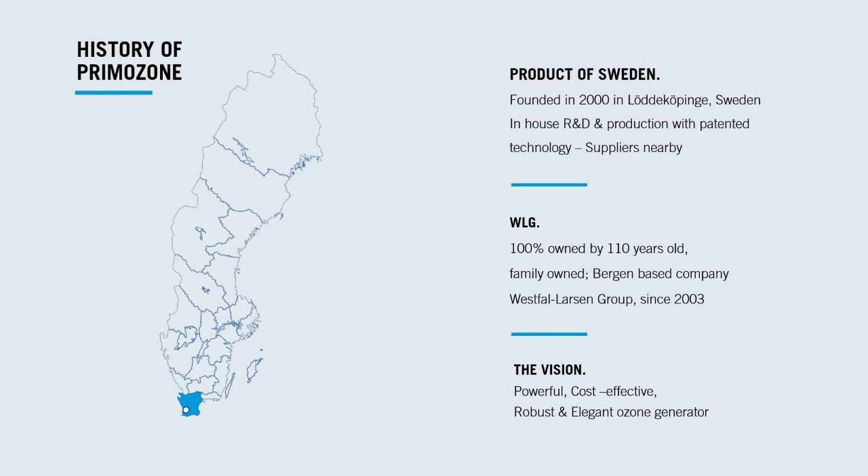We are also very proud to have a strong, well-established, long-sighted owner, the Norwegian family-owned Westfal-Larsen Group. With over 100 years of history, they have been our only owner since 2003. Our vision has always been to bring powerful, cost-efficient, robust, compact, yet elegant ozone generators to the market, and our goal is to redefine ozone technology worldwide.

Talking about worldwide - worldwide is a key word for us. We have always been working towards the international market, and now we're a little bit more international with our newly founded subsidiary Primozone Inc, located in Melbourne, Florida. Our aim for Primozone Inc is to be a reference point for sales and technology support, not only in the US, but the whole of North America.

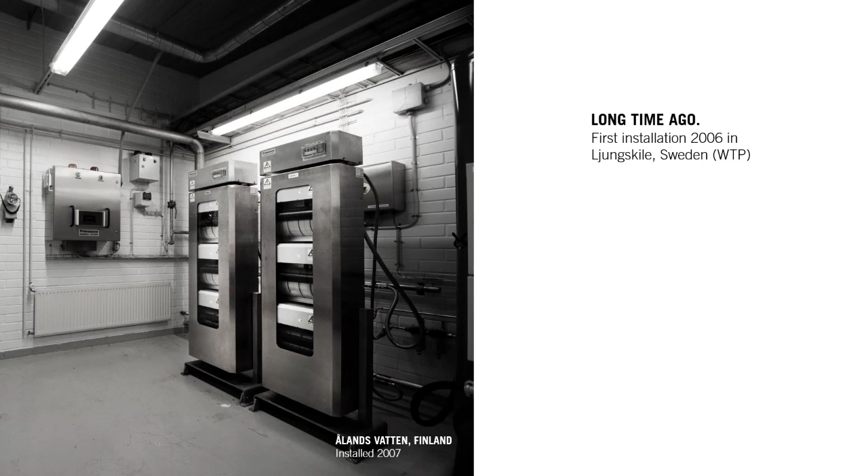Since the first Primozone installation in Ljungskile back in 2006, Primozone has expanded globally, and already our second installation was outside Sweden, namely Åland in the Baltic Sea between Sweden and Finland. We can now proudly state that the number of Primozone installations worldwide exceeds 500.

During the years of our growth, we have always kept an eye on the evolving regulations, leading us to other very important steps in our development, approvals and certifications. In addition to the CE marking on our entire product series, we now offer cUL approved control panels for the United States and Canada.

We pursue high quality and efficiency, not only of our products, but also of our company, which is certified compliant to ISO 9001 for quality management and ISO 14001 for environmental management. Primozone also owns a letter of access for the EurO3zon group dossier of approval of ozone as a safe biocide according to the European Union Biocidal Directive.

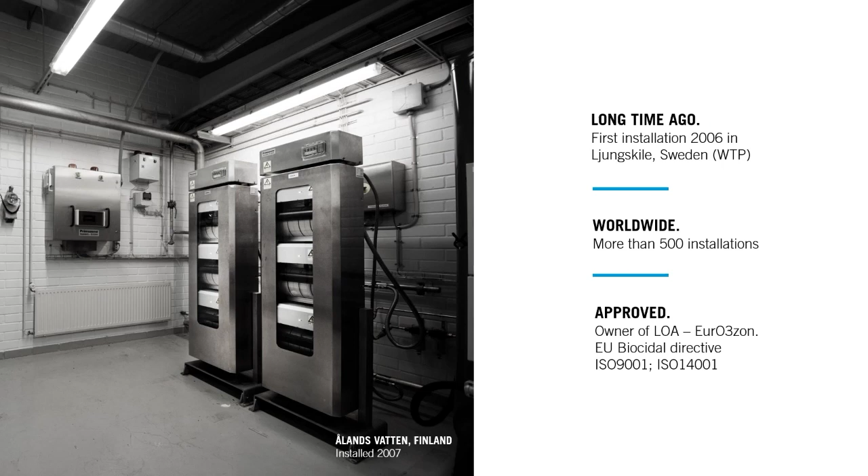Primozone operates in three main sectors: aquaculture, industrial, and municipal. Aquaculture, more specifically recirculating aquaculture systems. Scandinavia is leading the world of aquaculture and the progress in sustainable fish farming. We are proud to be part of this as the number one provider of ozone solutions for aquaculture in the world.

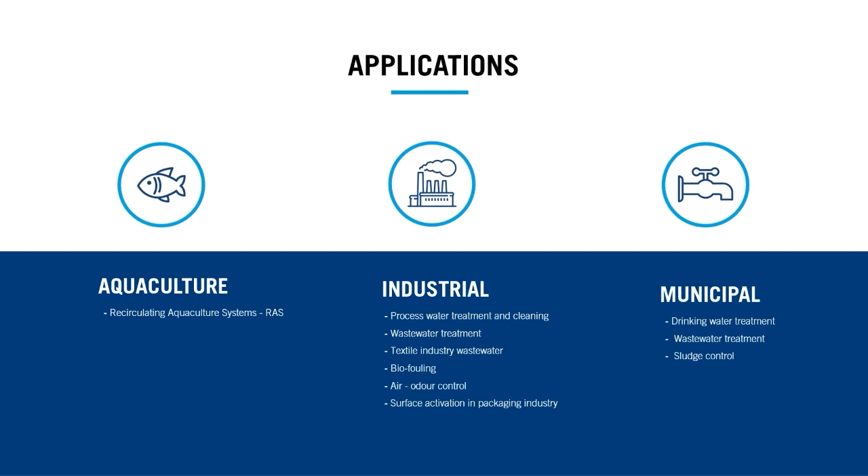We are in a number of industrial sectors and have experience with the applications of ozone to many different processes, thanks also to our products, which reliability and performance can meet even the highest demands - for example, those of the photovoltaic and semiconductor industry. In the municipal sector, we work with both drinking water and wastewater applications and have systems for water reuse and sludge control.

One of our core products is, of course, the Primozone ozone generator. The GM1-4 2.0 on the picture is our newest series of ozone generator, the most compact machine which can generate up to 240 grams of ozone per hour in the space of a bit more than half a meter cube.

They are not only space efficient, but they also save energy and time with the newly introduced features, which allows use of warmer cooling water, increasing generator reliability even more, and make it quick and easy to use with a modern and user-friendly interface.

Modularity and scalability have always been key to Primozone features. And so our ozone generators line ranges from the GM1-4 to single-sided generators GM6, 12 and 18, to the double-sided generators GM24, 36, 48, from 6 up to 2,400 grams of ozone per hour.

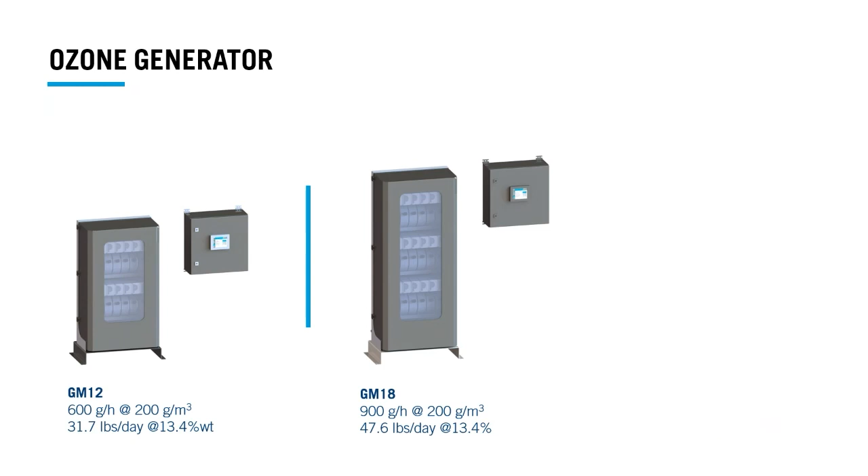This is done while keeping the same core, the Primozone patented reactor and power supply, and the same benefits: small footprint, high reliability, and minimal maintenance needed.

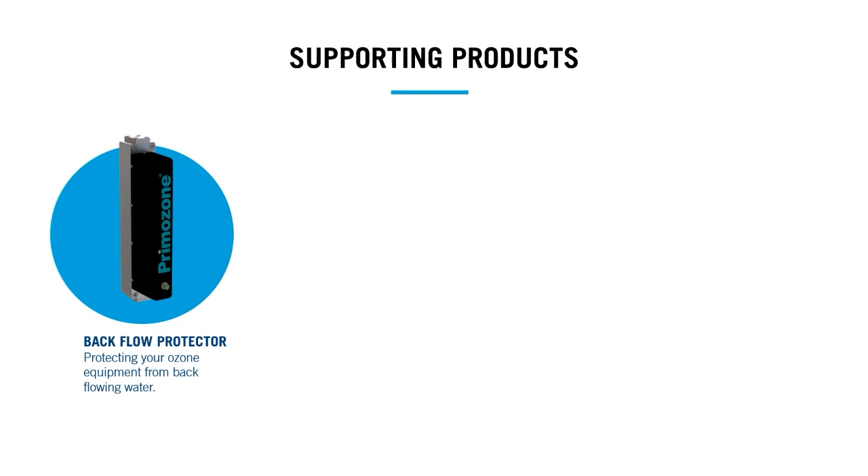We have the latest arrival in the series, the Primozone CSM cooling skid for effective cooling with minimal energy consumption where cooling water is available.

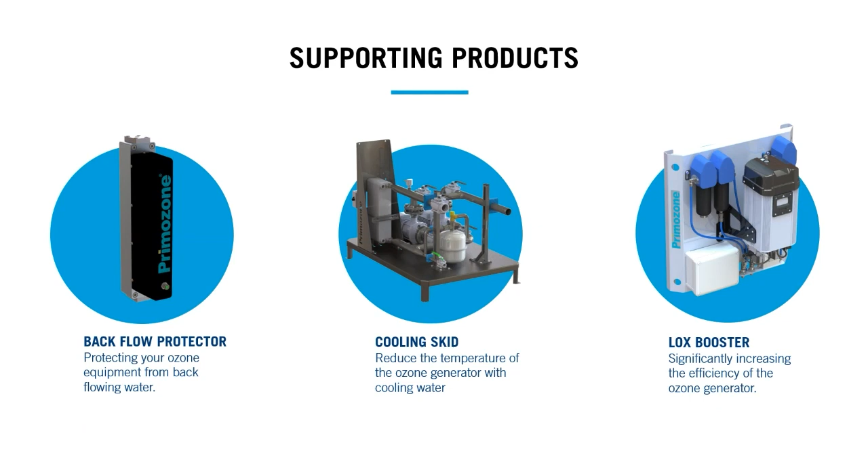And then we have the Primozone LOX booster to minimize the loss of ozone production and maximize your equipment performance when producing ozone from liquid oxygen.

Thank you, Jesper. And hello, everyone. So now from Primozone to ozone. All ozone providers owe their success to this powerful molecule and its unique, extraordinary features, which we will now look into.

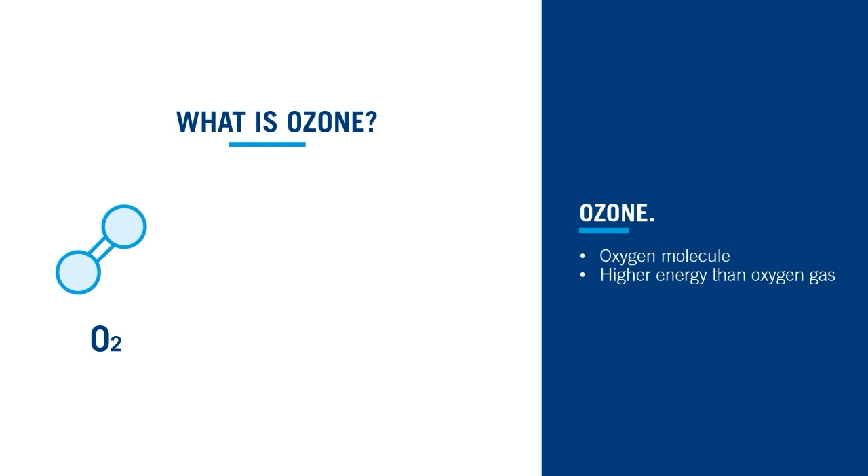Ozone is a similar molecule to oxygen, more specifically an allotrope of oxygen, one of the different physical forms in which the element can exist. At room temperature, both ozone and oxygen are gases, but while oxygen is odorless and colorless, ozone is characterized by a pale blue color and a unique strong odor, which gave it its name. The word ozone comes from the Greek word ozein, which means in fact to smell.

Molecules form when the total energy of the electrons is lower in the molecule than in the individual atoms. The lower the energy, the more stable the molecule. The oxygen molecule, O2, is the lowest and therefore most stable energy state and most common oxygen allotrope in nature.

There is a very strong double bond between the two oxygen atoms, which we need energy to break, electricity in normal practice. A small part of the electricity that we apply to oxygen will be transferred to its atoms, bringing them to a higher energy state, individual oxygen atoms, also known as oxygen radicals.

Oxygen radicals are characterized by very high energy. They are very unstable and will tend to bond with whatever can bring them to a lower energy state. When a single oxygen atom creates a bond with O2, ozone will be formed, O3.

Ozone's energy level is in between those of the oxygen radical, the highest, and of the oxygen molecule, the lowest. The bond between the oxygen molecule and the third oxygen atom is a single bond, which is weaker and less stable than the double bond between the oxygen atoms forming O2.

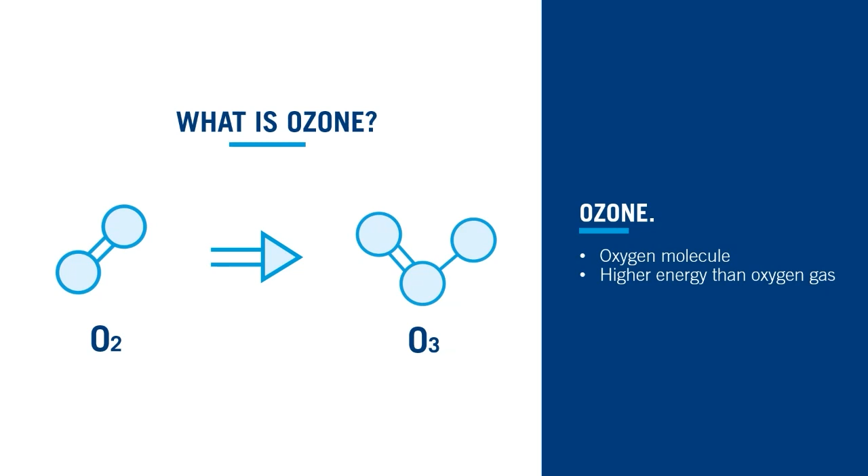Ozone is still a very high energy molecule, which means it is less stable than oxygen. Ozone won't stay ozone for a long time. It will always tend to revert to oxygen, its lower energy state. It will do so either through a chemical reaction with a different compound or spontaneously over time.

The half-life in water at room temperature is only 20 minutes, which means that over this time, half of the ozone will have decomposed back to oxygen. At higher temperatures, the half-life will be shorter. In other words, in warmer water, ozone decays faster.

This is not only true in water, heat in general destroys ozone, which is a critical aspect in the design of ozone generators, ozone distribution systems, and ozone processes. Temperature can play an important role in the design of ozone systems, especially for application to warmer effluents, like, for example, industrial wastewater. Temperature is also important when the reaction with the target compound itself generates a high amount of heat, which could affect the next steps in the process.

When ozone reacts with certain compounds, heat is generated, and if these compounds are present in high quantities and the effluent is being recirculated for complete treatment, its higher temperature can make the application of ozone less and less effective over time.

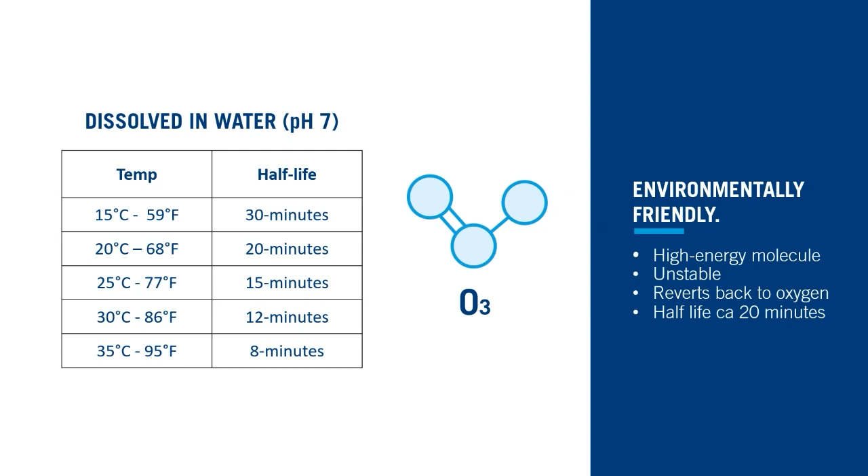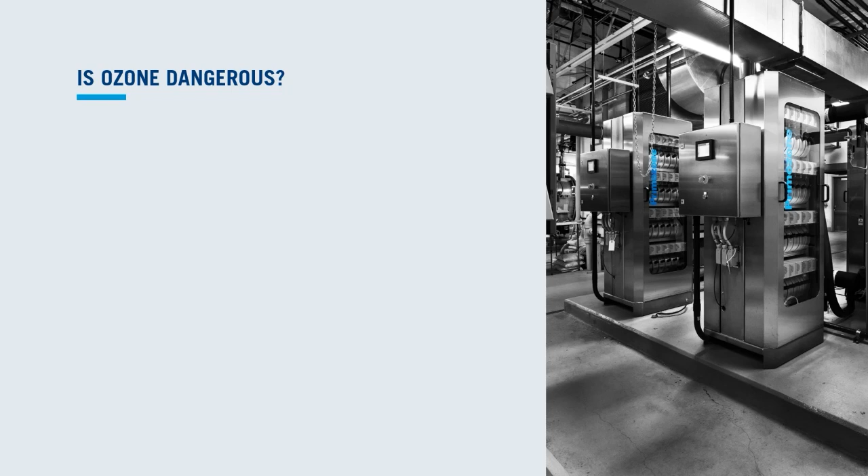Ozone and oxygen are both essential for our survival. For example, the ozone in the atmosphere shields us from the sun's harmful UV light. But ozone, unlike oxygen, is not a gas that we should breathe. It would have a harmful effect on our lungs. This led to the common misconception of ozone being a very dangerous chemical, while in reality, ozone is not any less safe than other common substances used in industry.

One clarifying example is perhaps nitrogen. It is used in food packaging, like packed meat and vegetables, to preserve their freshness, protect their nutrients, and prevent microbial growth. Nitrogen cannot be detected by humans, and the nitrogen-enriched environment depletes oxygen. So if the concentration of nitrogen is too high, the body becomes oxygen deprived before one can even realize what is happening. That is definitely not the case with ozone, which has such a strong smell that people can detect its presence at a concentration in ambient air much lower than what would be dangerous.

But let's look together at some ozone facts, which will hopefully make us more familiar with this substance. Ozone is naturally occurring. It is produced, for example, by lightning and by UV light from the sun. A small percentage of the Earth's atmosphere is ozone, and ozone is also part of the stratosphere.

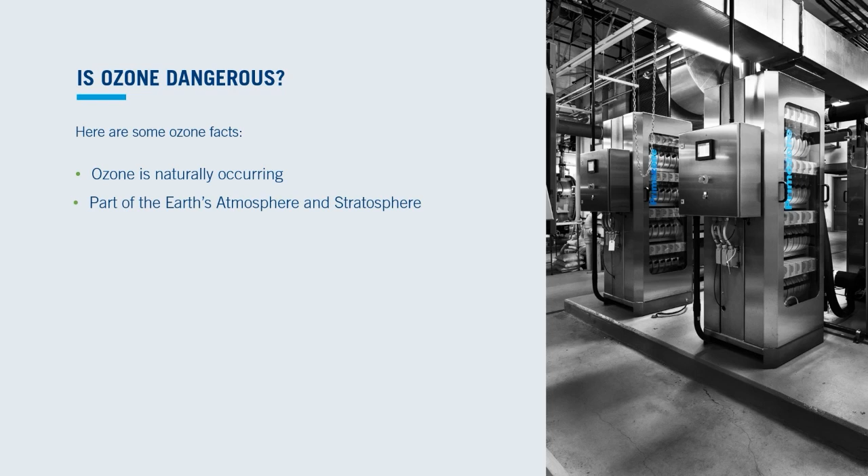Ozone is approved as a safe biocide according to the Biocidal Products Regulation. An active substance must be evaluated and approved before products containing it can be made available on the market or used in the European Union. FDA rules establish that ozone is generally recognized as safe, meaning it can be used on food products. The safe exposure limit, what man can safely breathe for 8 hours, is a time-weighted average of 0.1 ppm.

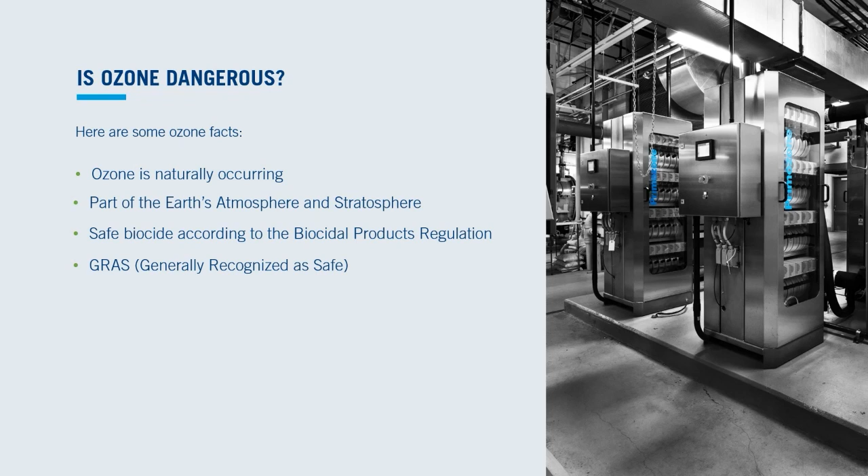Ozone has been used for over a century to treat drinking water, and ozone is dangerous to life or health at 5 parts per million, but most humans can clearly detect ozone already at 0.02 ppm, which is 250 times lower. And finally, the number of people on hospital records that have died from ozone gas is zero.

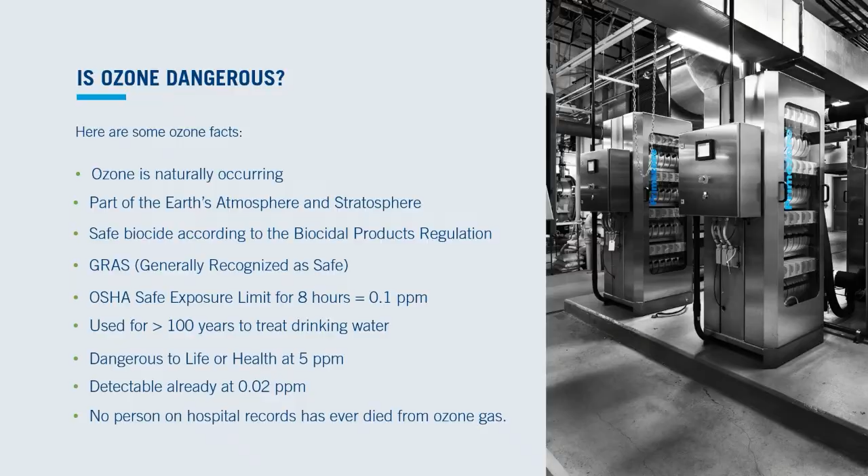Now that we have brushed up our knowledge of ozone, let's go straight to the benefits. Coming next, the benefit of ozone on treatment processes.

Because of its high energy, ozone is extremely powerful. Its oxidation potential, also known as redox potential or ORP, is a measure of the tendency of ozone to acquire electrons, to be reduced, or a measure of its tendency to oxidize, if we see it the other way around from the target compound perspective. Redox potential is measured in volts. The higher its value, the greater the species' affinity for electrons and tendency to oxidize.

As we can see in this list of oxidizing reagents, ozone has the highest oxidation potential after fluorine. The use of fluorine for water treatment is, however, not practical. Therefore, ozone can be considered the most powerful oxidizer available for water treatment applications. One more thing we can notice in the list, ozone has a 50% higher oxidation potential than chlorine gas, and more than double compared to sodium hypochlorite, whose oxidation potential is often used as a reference.

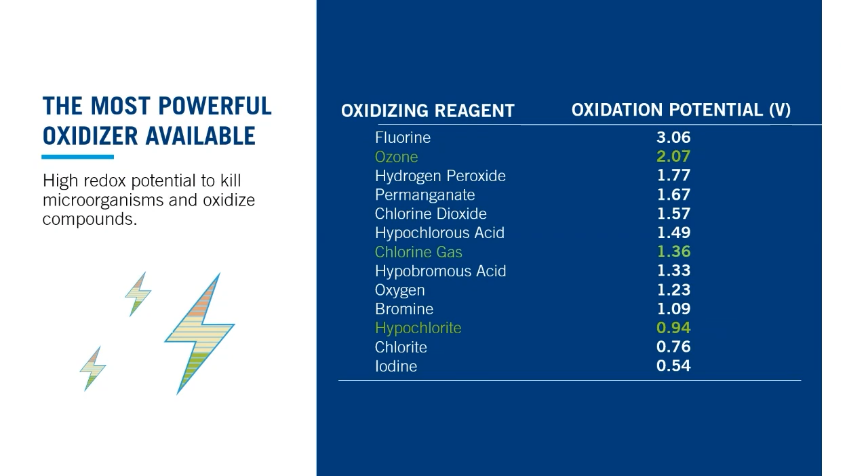Another characteristic which makes ozone perfect to attack microorganisms and dissolve pollutants is its high solubility in water. Pure ozone is 13 times more soluble than oxygen, but in practice, ozone is not used pure. It is generated and applied as a gas mixture, ozone mixed in oxygen.

Two parameters influencing the solubility of ozone gas in water are pressure and temperature. Higher pressure and lower temperature will lead to increased gas solubility. Lower pressure and higher temperature will lower the gas solubility.

A third parameter is the percentage of ozone in the gas mixture, the ozone concentration. It can be lower or higher depending on the specific ozone generation technology used. But the higher the ozone concentration, the higher the solubility in water of the gas mixture. This is very important to remember when looking up values for ozone solubility. The values might be expressed at a different concentration from what will be used in a specific project. And if a project involves adding high quantities of ozone to an effluent, working at a higher ozone concentration can help by maximizing the solubility in water of the ozone gas.

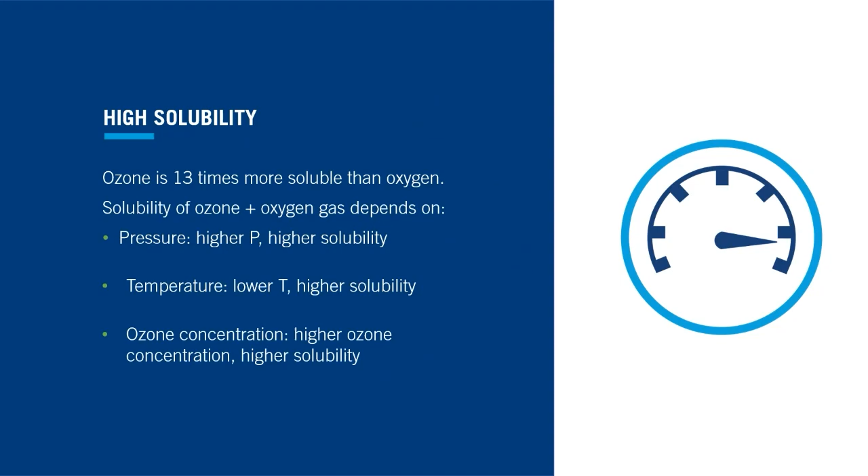Disinfection is defined as a process designed specifically to destroy pathogenic organisms. It kills bacteria, protozoa, cysts, and viruses.

Commonly applied disinfectants, such as chlorine, penetrate the cells by diffusion. Within the cell, chlorine affects the microorganism enzymes. UV light inactivates microorganisms by destroying parts of their DNA, leaving them unable to perform vital functions. Ozone works on a completely different principle.

Because of its high oxidation potential, ozone oxidizes the bacterial cell wall. Once ozone has entered the cell, it oxidizes all essential components, enzymes, proteins, DNA, RNA. The cellular membrane is damaged by ozone, so the cell will fall apart, and the damage is permanent.

What does this mean in practice? While microorganisms can become resistant to biocides like chlorine over time, they can never become resistant to ozone. Some can reactivate after inactivation with UV light. There is no such thing as reactivation of pathogens after ozonation.

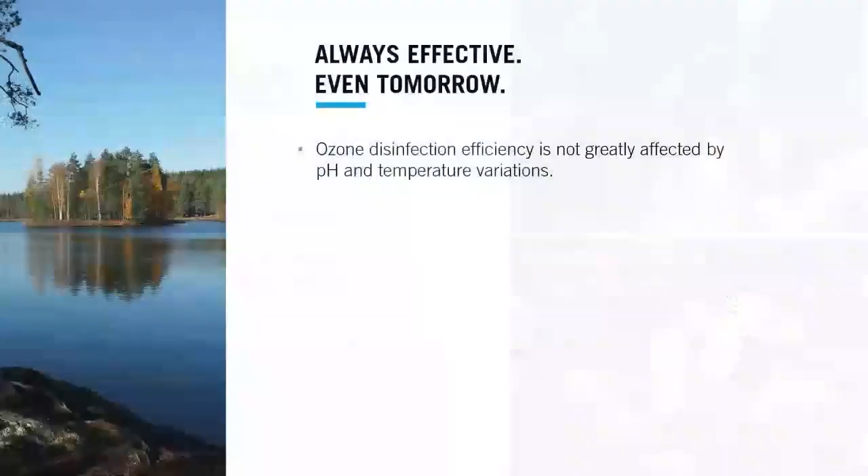Ozone will be always effective. Its disinfection efficiency is independent from pH and temperature variations. Ozone can provide any level of disinfection with any quality of water and wastewater, while UV, for example, needs good transmittance to be effective.

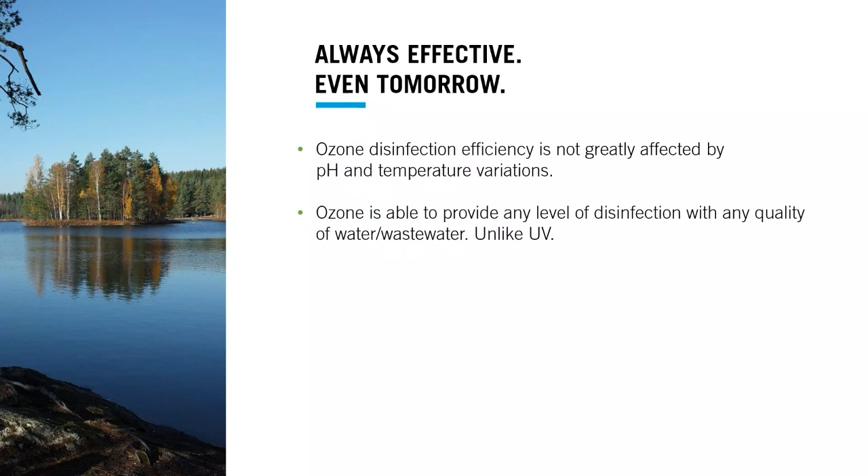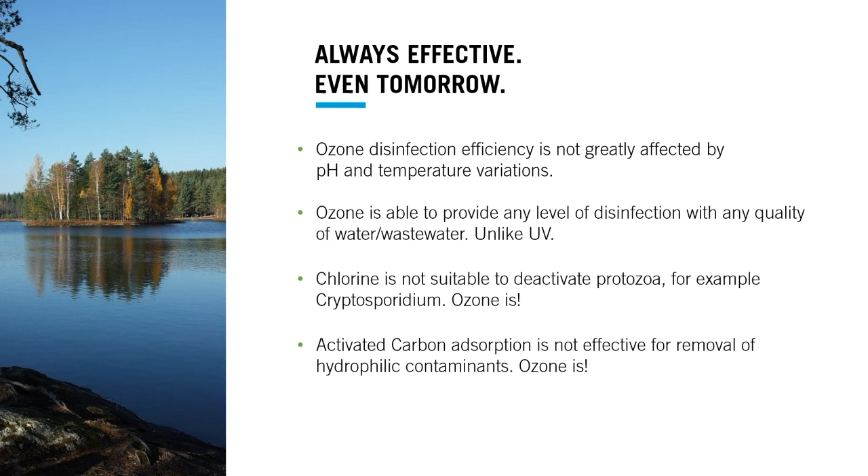Chlorine, although suitable for the inactivation of bacteria and viruses, cannot be effectively used to deactivate protozoa, while ozone can. Activated carbon adsorption is not an effective method for removal of, for example, 1,4-dioxane, because this contaminant is hydrophilic, meaning it has a very high affinity for water and is completely soluble. Ozone can destroy contaminants even if they are completely dissolved in water.

Ozone's broad effectiveness is a great benefit today, but it will be an even greater one tomorrow. Ozone is the only disinfectant which also breaks down contaminants of emerging concern. So installing an ozone disinfection system today will comply with the strict upcoming rules for removal of these contaminants. A different system will have to be replaced to comply with the same rules.

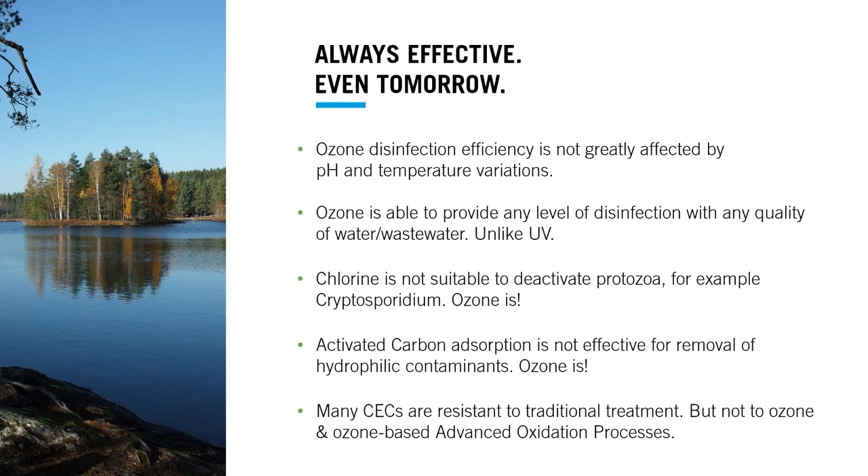Being a highly reactive oxidant, ozone has many different applications. If we just look at the things ozone can do in a drinking water treatment plant, it can be used for disinfection or applied earlier in the process to reduce disinfection byproducts. It can deal with taste and odor issues, not only in surface water but also in groundwater, breaking down odor-generating compounds like hydrogen sulfide. Applied as a preoxidant, it can remove iron and manganese, and so on.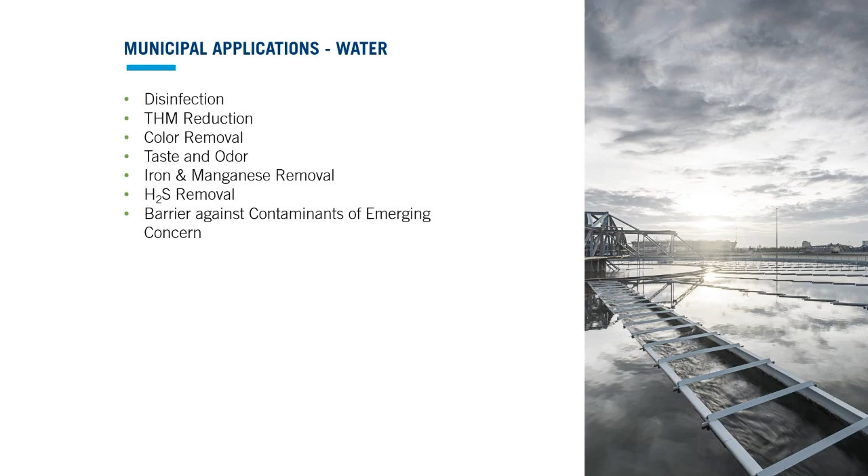There are also many possibilities to apply ozone in a wastewater treatment plant. Again, disinfection, but also color removal, odor control, COD reduction, removal of pharmaceutical residues prior to discharge to prevent the contamination of the receiving surface waters with pollutants that might affect marine life or make their way to the intake of a drinking water plant. There are ozone applications also for sludge conditioning and in the fast-growing sector of water reuse.

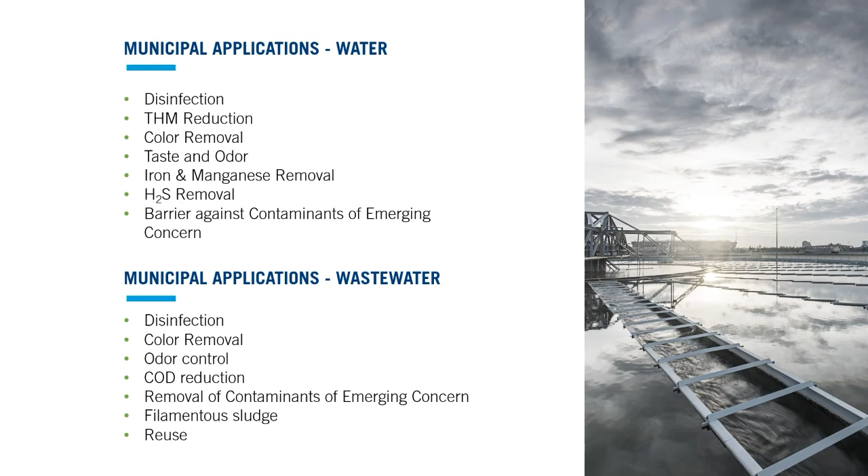The range of industrial applications of ozone is even wider. We have, for example, treatment of ballast water to prevent contamination of the marine environment where the ballast water is discharged with different species or contaminants loaded up elsewhere. We have cooling tower applications and applications in the oil and gas sector.

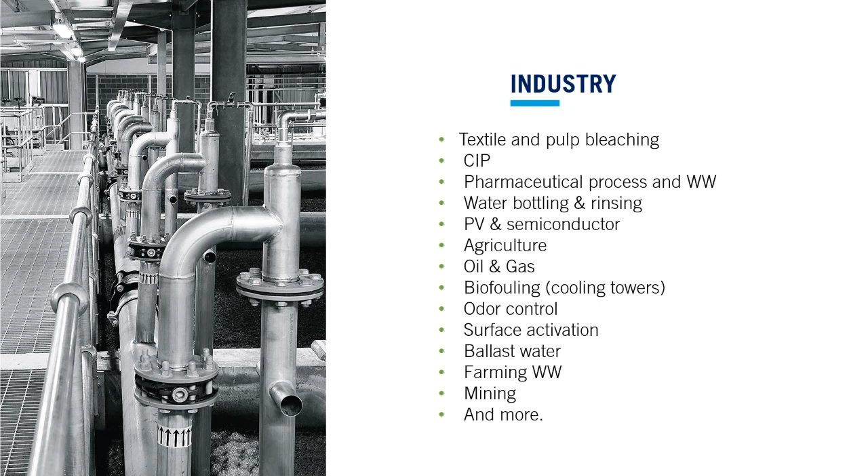Ozonated water can be used for bottle rinsing and filling, or on crops and fruits to extend their shelf life and protect them from parasites. Ozone can be used to bleach pulp and textile, but also to remove color from the wastewater of paper mills and textile factories. With these and many more applications, ozone proves itself extremely versatile, bringing benefits to a number of sectors.

The benefits of ozone in the aquaculture sector are outstanding. Ozone is often used in recirculating aquaculture systems to keep the water clean and to limit the amount of makeup water needed for the fish farm operation. Using ozone for this purpose also leads to an increase in the dissolved oxygen content of the water and to

a general water quality improvement, which has a positive effect on fish health and growth. Consequentially, the productivity of the fish farm increases, not only in number, but also in each fish slaughter weight. Ozone is also used to disinfect the intake water of fish farms to prevent the spread of diseases, which could

make the farm lose an entire batch of production. The positive effects of ozone can be detected even in the final product, as ozone can remove from the recirculating water compounds which might give a characteristic off flavor to the meat of farmed fish.

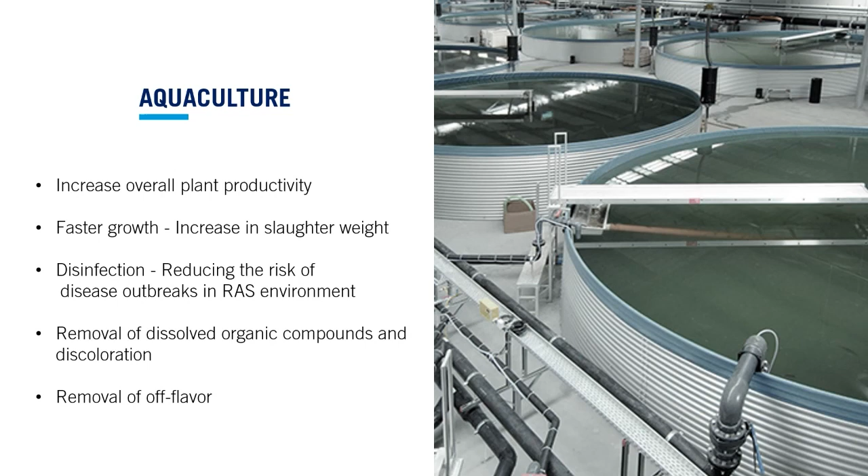Ozone can bring benefits to industrial processes which one would not expect. Here we would like to share with you some of the most promising and most interesting effects of ozone in different industrial sectors. First one is surface activation.

Ozone can make surfaces which would normally repel each other stick together. This is beneficial for the food packaging industry in the process step where different layers of multi-layered food packaging are glued together. Ozone will make these layers stick together quicker and increase the productivity of the food packaging production plant. We have an example of that in our closest vicinity in the city of Lund.

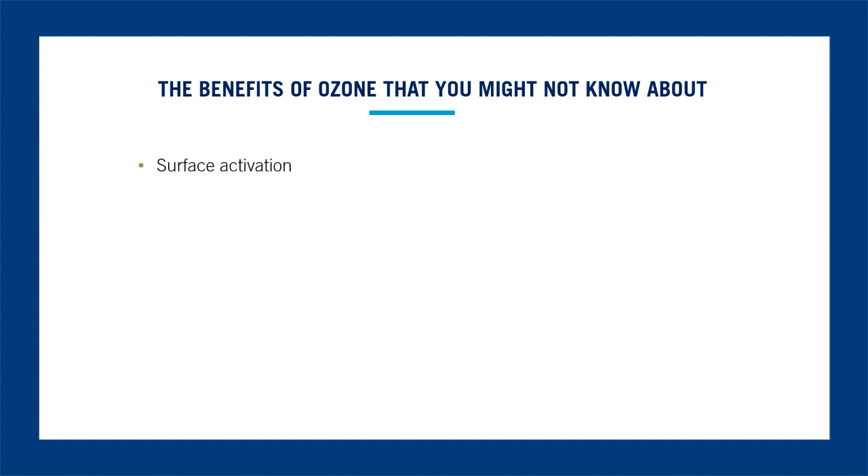In the process of production of solar wafers, there is a cleaning step in which heavily ozonated water can be used to get rid of chemical residuals. This step increases the efficiency of the solar wafers. Primozone has over 100 installations for this application, but it is to be noted that due to the very high dissolved ozone concentrations involved, the ozone must be produced at the highest concentrations for this to be feasible.

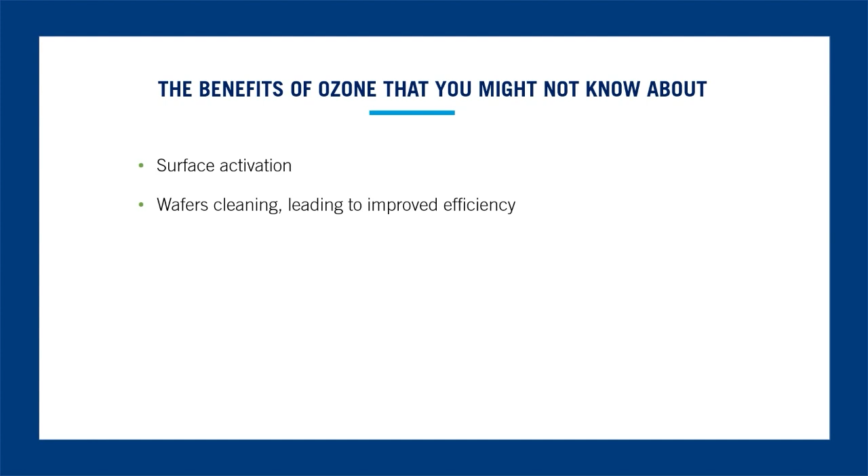Ozone can be used not only in water, but also in air. If ozone is injected in the exhaust of, for example, a restaurant, it can break down grease and prevent its accumulation in the exhaust ducts. This will avoid that the energy required for ventilation increases over time because of the grease buildup. And most importantly, it will eliminate a fire hazard.

We have then textile bleaching. Everybody knows the effect that bleach has on clothing.

What you might not know is that ozone can also obtain the stone wash effect on jeans. This can be done by special industrial washing machines made to achieve this nice design without the use of polluting chemicals. Primozone is proudly part of many of these environmentally friendly systems for jeans bleaching installed worldwide.

Filamentous bulking sludge is a well-known problem at wastewater treatment plants. Filamentous bacteria grow on the sludge surface and prevent its settling.

Normally, ozone wouldn't be considered a suitable solution as it is a very powerful, non-selective oxidant. So the concern would be that ozone kills all microorganisms in the sludge, including the good bacteria.

Surprisingly, ozone has been proven to selectively break down the filamentous bacteria first. So a small seasonal ozone dosage can improve settling of the sludge without affecting its quality.

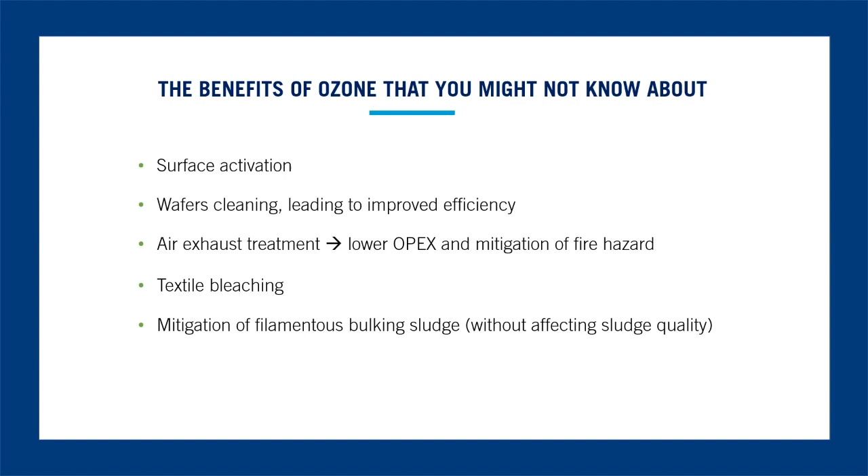And finally, reduction of surface tension. Ozone can reduce the energy required to pump water deep underground, a benefit, for example, in oil and gas applications.

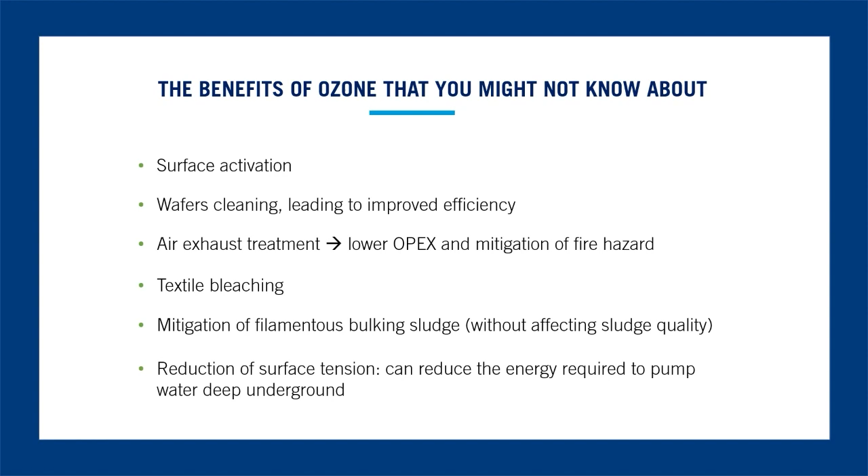From all the great things, well-known and unexpected, that the small ozone molecule can do, let's dive into the practical advantages of ozone systems, and I'll hand over here to my colleague Jesper.

Thank you very much, Ilaria.

As ozone is an unstable form of oxygen, it can't be stored nor transported and must therefore be produced on site, where and when it's needed. For this reason, ozone generators have been developed.

This might sound like a disadvantage at first, but it is thanks to the natural characteristic of ozone that there has been great technology advancement in ozone generation technology.

As we must produce exactly the quantity of ozone that is needed, ozone generators have been developed in many different sizes to adapt to each single user's demand.

Also, as we must produce ozone exactly when it's needed, and ozone demand is rarely constant, the evolution of ozone generator technology has brought to market machines that are not only scalable, but also faster, able to start up and ramp up

and react to changes in the ozone demand much quicker than in the past.

There is an increasing level of automation in ozone equipment and systems, making operations almost fully automatic and limiting the amount of human interaction needed on a daily basis.

Today, the use of ozone is just as simple as the use of regular chemicals, but with ozone, there is no need to ship or handle chemical products, which reduces safety hazards and hassles.

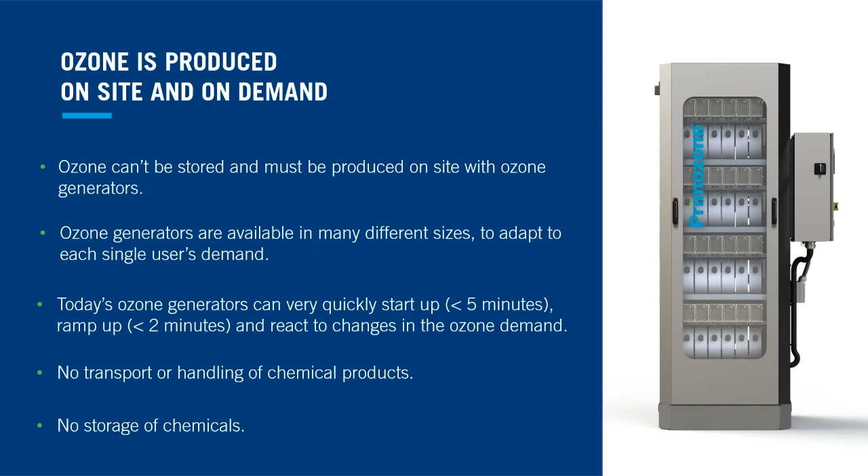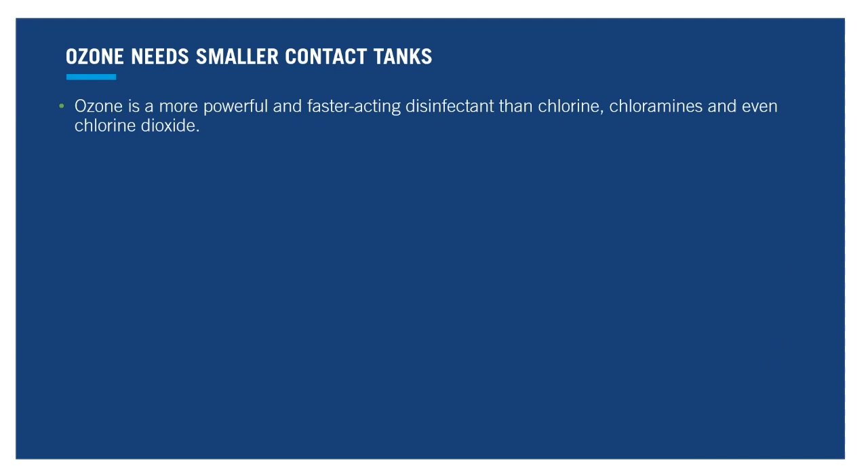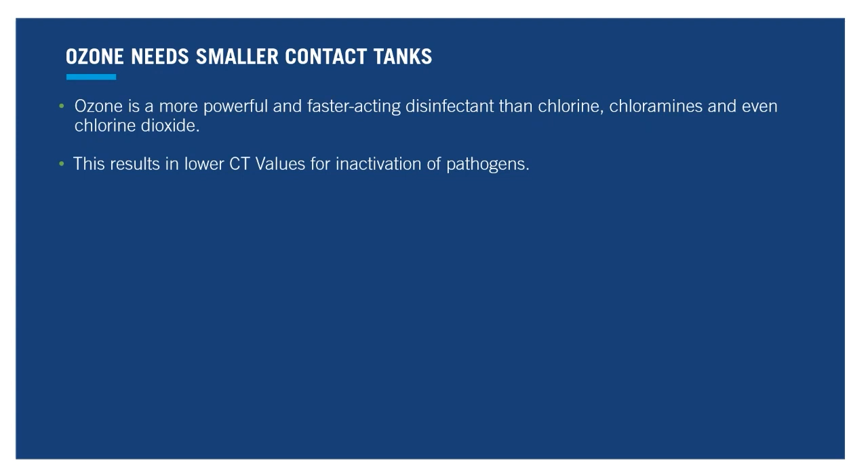The CT value is the product of concentration and contact time. Contact tanks are designed to provide a certain contact time for a certain flow.

So their dimension at a constant flow depends on the required contact time. The CT value, that's the contact time, and therefore the size of the contactor, will always be lower with ozone.

With shorter necessary contact time, the transition is sometimes possible from a traditional concrete basin to a serpentine ozone contactor.

This is a simpler, more space efficient and cost efficient method to achieve contact time, which we can see one example of here to the right.

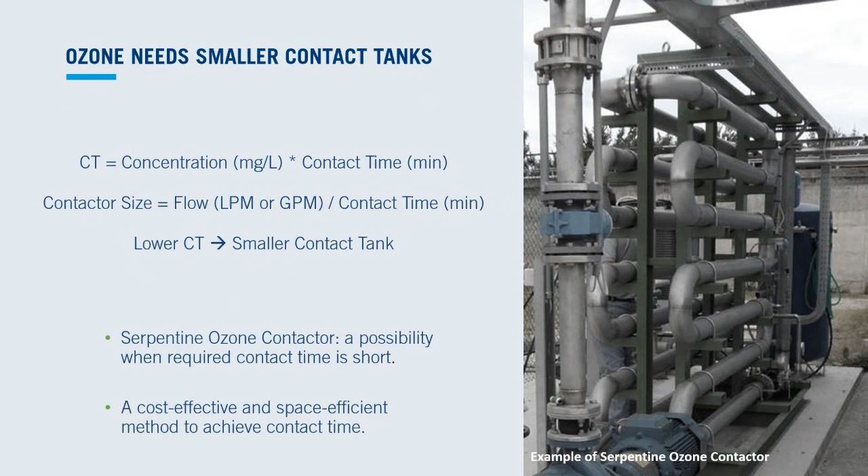Doing more than one thing at a time and doing them well is everything but easy, I can tell. But ozone, unlike us, is great at multitasking.

The most common reason for using ozone at the first step of the drinking water treatment process is to reduce disinfection byproducts.

But the application of ozone to raw water will bring several positive side effects. It will improve taste and odor of the water. It will provide a barrier against contaminants entering the plant, such as, for example, pesticides.

It will turn iron and manganese from solubles to suspended, making them easier to filter. It will also extend filter lifetime, including GACs, granular activated carbon, and increase the time between backwashes.

Furthermore, partial oxidation with ozone will polarize the target compounds, increasing the efficiency and effectiveness of flocculation, coagulants, or polymers in later steps. In other words, with pre-ozonation, a lower amount of chemicals will be needed.

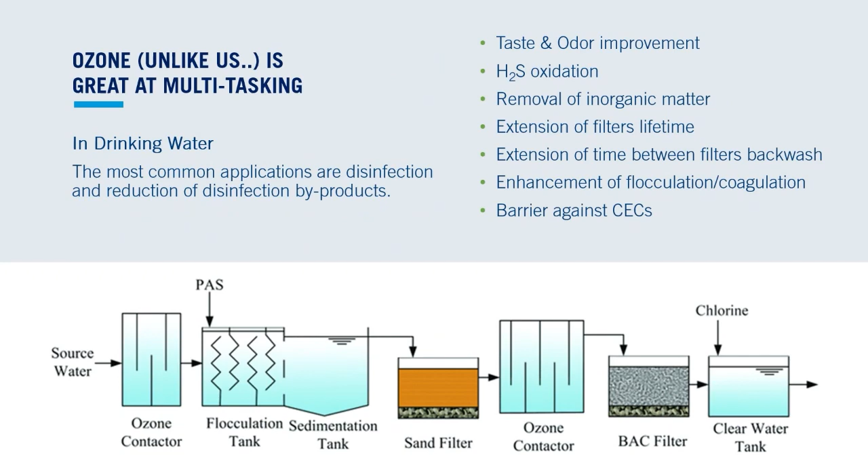And what about wastewater then? Well, the most common application is disinfection, but ozone can do so much more in the wastewater treatment process.

If applied in the intake, ozone can break down complex organics to make them more biodegradable and bioavailable, and improve the removal in biofilters. Ozone will also increase the biodegradability of wastewater and reduce the organic load on disinfection, thus reducing the required amount of disinfectant concentration.

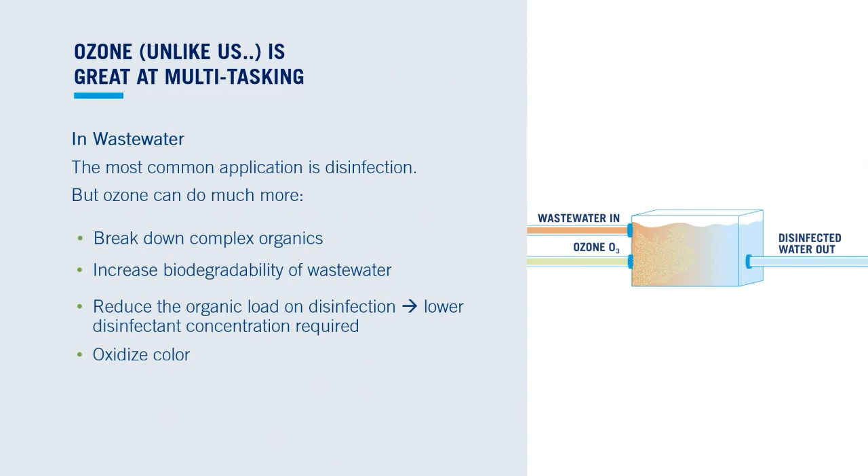If applied later in the process, ozone can be used not only as a disinfectant, but also to oxidize color and to get rid of contaminants which are harder to remove. It will also increase the dissolved oxygen content of the wastewater, which will improve the oxygen content of the receiving body of water. And the best thing is, ozone can achieve several water treatment goals at the same time.

It has multiple benefits when applied at a single point in the process, but a single ozone system can produce ozone and distribute it to different steps of the treatment process, or even of the wastewater treatment plant, for example if used for disinfection and for sludge conditioning.

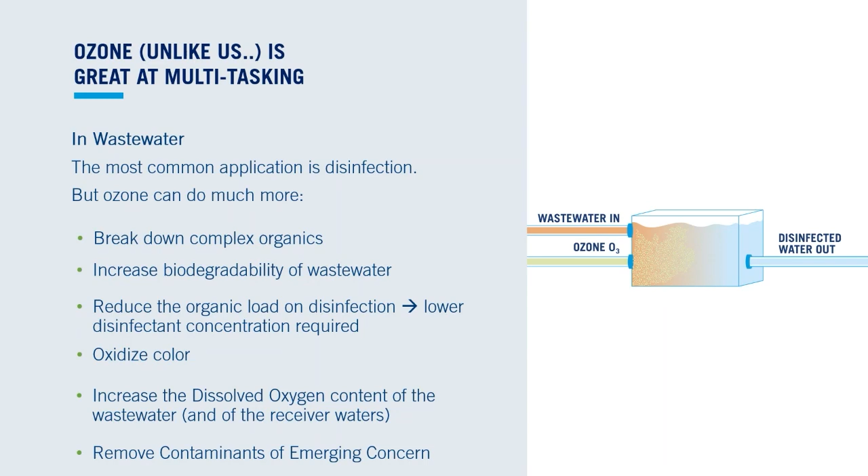The capital cost of ozone equipment is generally higher than the cost of other treatment methods. However, it should be kept in mind that it also keeps operating costs down. The following facts are to be considered when evaluating the capital expenses against the operation cost of an ozone solution.

As we just saw, ozonation will achieve several water treatment goals at the same time. One ozone system, that is one capital expense, can bring benefits to multiple parts of the treatment plant.

Ozone also reduces the operating cost of other water treatment steps, for example reducing the amount of chemicals needed for coagulation and flocculation, extending the lifetime and the time between backwashes of filters.

Pre-ozonation can reduce the amount and the cost of disinfectant needed. Also for residual, because if the water has been ozonated, the residual in the finished water can last longer in the distribution network.

Compared to ozone, other treatment methods need continuous sourcing and transportation of chemicals, a high and constant expense. Some methods need regular replacement of parts and regular maintenance, for example UV.

Some methods generate waste whose disposal can be difficult and expensive, like contaminated activated carbon. Primozone ozone generators need minimal preventive maintenance and no regular replacement of parts or disposal of any material.

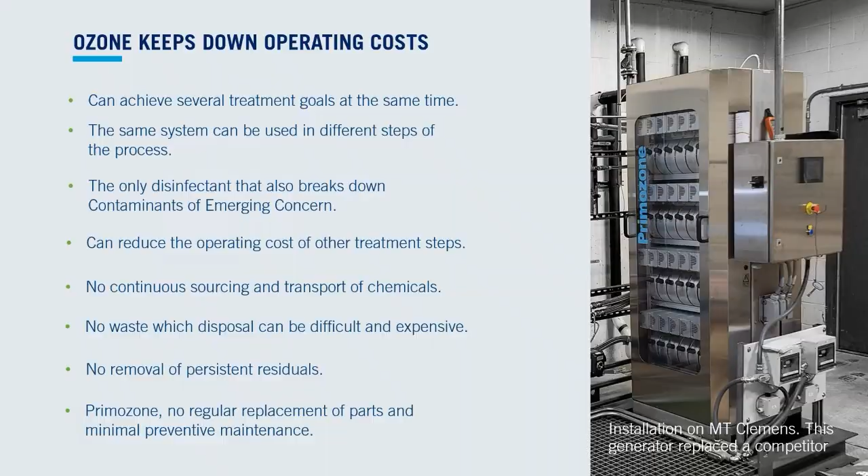Having that in mind, this is the last section for today, but not at all the least important. It's about the benefits of ozone for the environment. For more than 20 years, Primozone has worked to make ozone widely available and easy to use, with the ultimate goal to spread throughout the globe what we consider to be the natural way to clean water. Ilaria, please go ahead. Thank you, Jesper.

Ozone can lead us away from micropollutants. Micropollutants are contaminants that, because of human activities, are found in water at concentrations well above their natural level, even though they still remain at trace levels. The list becomes longer every year, and it includes, for example, pharmaceuticals, artificial sweeteners, hormones, and caffeine.

Ozone effectively breaks down micropollutants. Primozone has taken part in an extensive study which looked specifically at pharmaceuticals, a study started because of the devastating effects that the discharge of pharmaceuticals has had on surface water and aquatic life in Sweden. The study has shown that 98% removal of most pharmaceuticals is achievable with ozone.

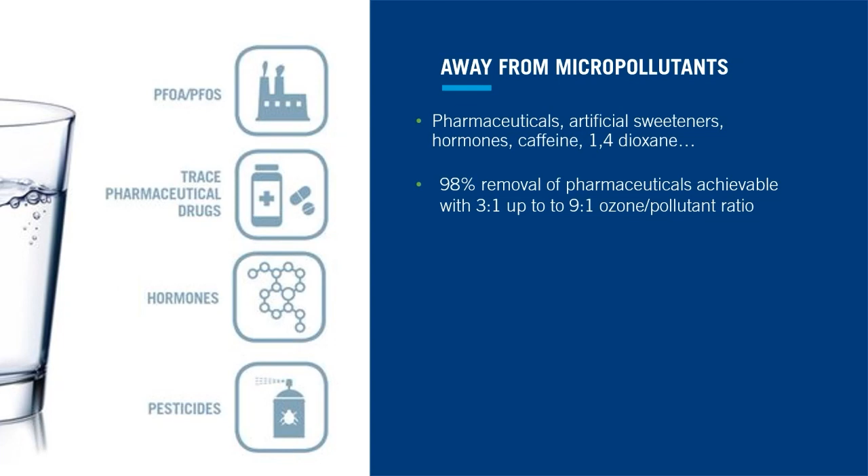This is achievable with target compound ratios ranging from 3:1 for the most common painkillers, up to 9:1 to break down proteins and the most complex molecules. Being able to remove pharmaceutical residues is of critical importance not only for the environment, but also for wastewater treatment plants because of the upcoming regulations.

In Switzerland, it is already by law that all new wastewater treatment plants must be able to achieve 80% removal of incoming pharmaceuticals, and similar rules will be soon implemented in the entire European Union.

Micropollutants generally survive traditional treatment. They make it through the treatment plant and can end up being discharged into the environment. In most cases, ozone will succeed where traditional treatment fails.

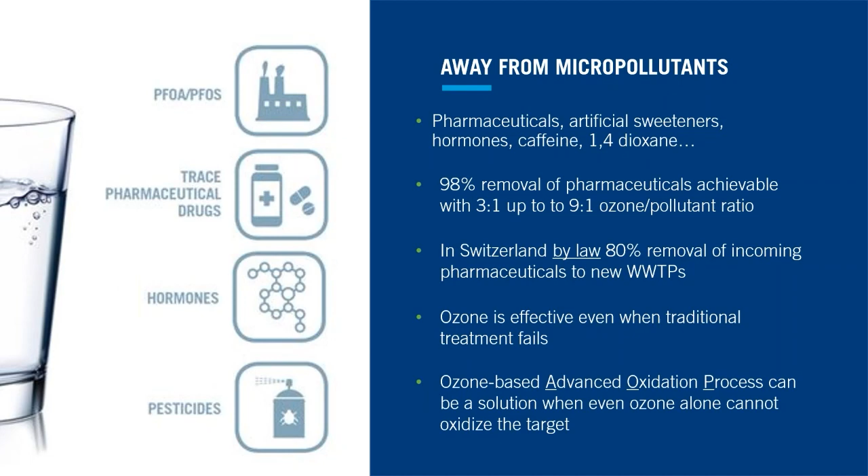And when even ozone alone cannot oxidize the target compound rapidly, an ozone-based advanced oxidation process can be the solution to achieve fast and effective removal. An ozone peroxide AOP, for example, can achieve almost complete reduction of most contaminants.

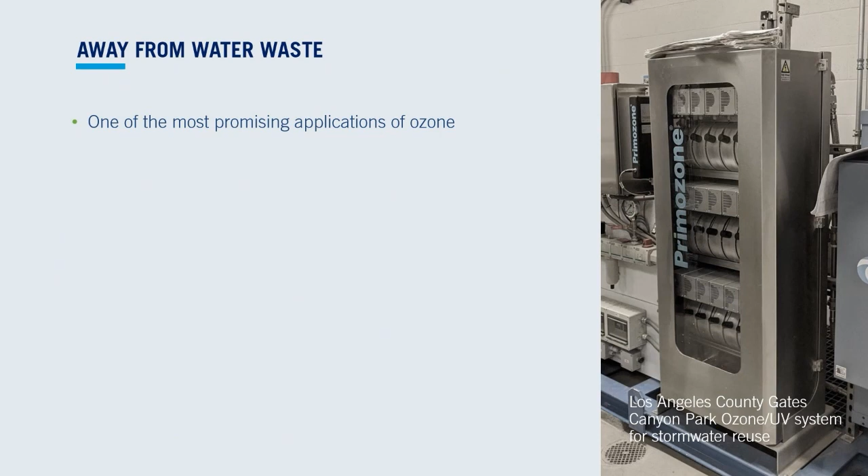One of the most interesting and most promising applications of ozone is water reuse, a sector which is growing extraordinarily fast in a world where water becomes more and more scarce every day. Intensive research and development of more advanced treatment processes is the only way to reclaim at least part of our most precious resource and get away from water waste.

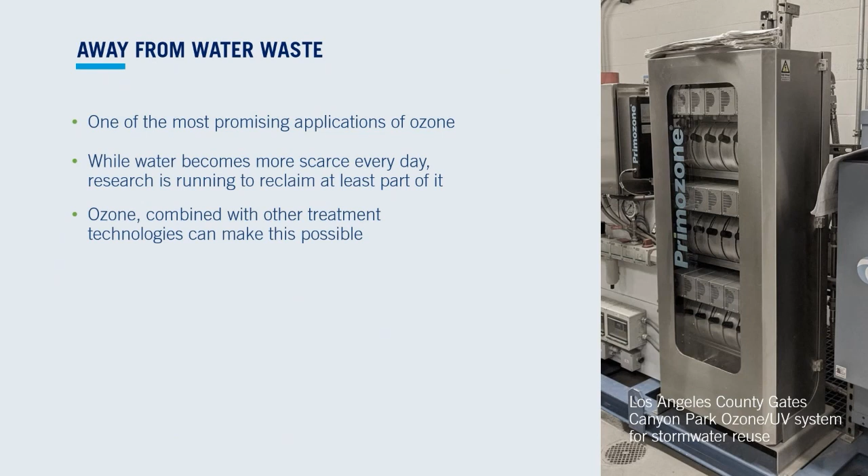Due to the high level of treatment needed for reuse, ozone is generally combined with other treatment technologies for reuse applications, for example with UV. This makes it possible to recover irrigation water, storm water, or even wastewater for uses ranging from landscaping to the irrigation of crops, all the way to potable water.

One example that shines in this sector is Los Angeles County Gates Canyon Park, where storm water is reused for irrigation of the park, thanks to an advanced treatment process based on ozone and UV.

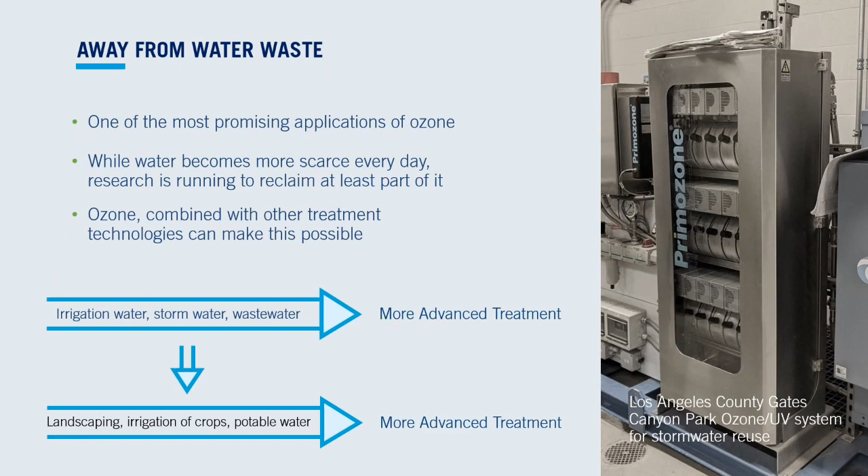Ozone doesn't leave any undesired traces behind. All we need to generate ozone are oxygen and electricity. Ozone generators do not have parts that need to be replaced regularly and do not generate waste, making it a technology with minimal environmental footprint.

Due to its instability, ozone's lifespan in aqueous solutions is very short, less than an hour, so any ozone residuals will not persist. Ozone is nothing more than a higher energy state of oxygen, so whether it reacts or not, it rapidly decomposes in water, reverting back to oxygen.

As a consequence, removal of residuals is not necessary, unlike, for example, with chloramines, which can persist for a long time. When chloramines are chemically removed, ammonia may be released, which has a toxic effect on fish, causes corrosion of lead and copper, and serves as a nutrient for nitrifying bacteria, so it can cause nitrate levels to rise.

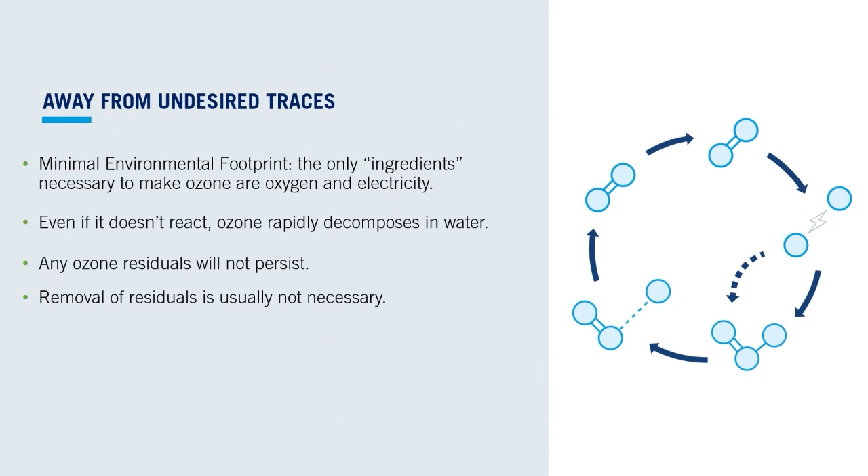All that is left after some time from applying ozone is oxygen. So on the opposite, the increased oxygen levels consequential to the use of ozone have a positive effect on marine life, a great benefit for the receiving waters of a wastewater treatment facility, and also in recirculating aquaculture systems.

Here we can see a little bit better the different steps of ozone generation and reaction. Start from oxygen. We apply electricity to break it into atoms, only 2 ingredients, as we said. The single atomic oxygen bonds with an oxygen molecule and forms O3. When ozone reacts, or after time, the third oxygen atom is released, and we're back at the beginning of the cycle, to oxygen.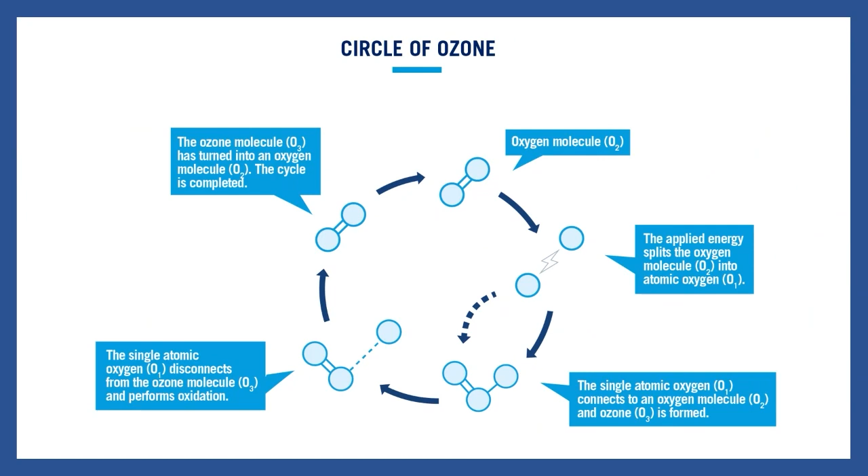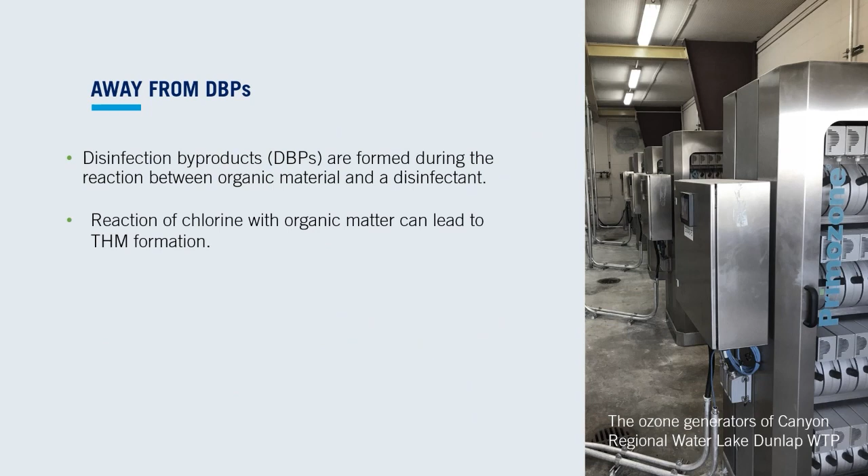Disinfection byproducts, or DBPs, are mainly formed during the reaction between organic material and a disinfectant. The reaction of chlorine with organic matter can lead to the formation of chlorinated disinfection byproducts, such as trihalomethanes, THMs, which are classified as carcinogenic to humans.

Using ozone, we can get away from the risk of forming dangerous byproducts. Ozone's DBP formation potential is minimal, and ozone can remove DBP precursors. For example, at Canyon Regional Water Lake Dunlap Water Treatment Plant in Texas, ozone is used as a pre-oxidant to reduce THM formation, at the same time as dealing with cryptosporidium and seasonal taste and odor issues caused by algae blooms. One of the best benefits of ozone is that there is no common disinfection byproduct of ozone, just oxygen.

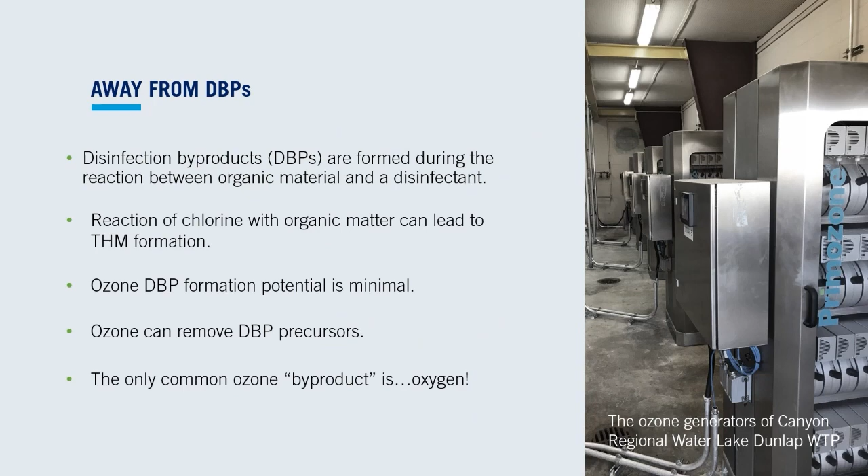Speaking of disinfection byproducts, the question might arise, what about bromate then? Bromate formation can occur when elevated concentrations of bromine are present in the raw water, more than 50 micrograms per liter. But bromate formation can be mitigated or even prevented with simple process changes.

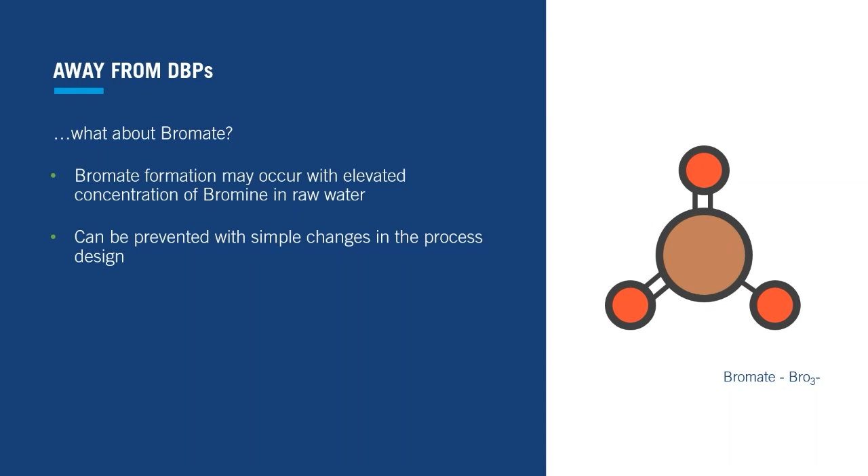The simplest but not the only methods to avoid bromate formation are: number 1, utilizing ozone at higher concentrations by weight. This will have many side benefits, such as reduced oxygen consumption, improved mass transfer, smaller contactor size, and lower side stream injection pumps horsepower.

Number 2, injecting ammonia right upstream the ozone injection point in the contact chamber. So, with just some attention during the process design, ozone can lead us away from the old issue of disinfection byproducts.

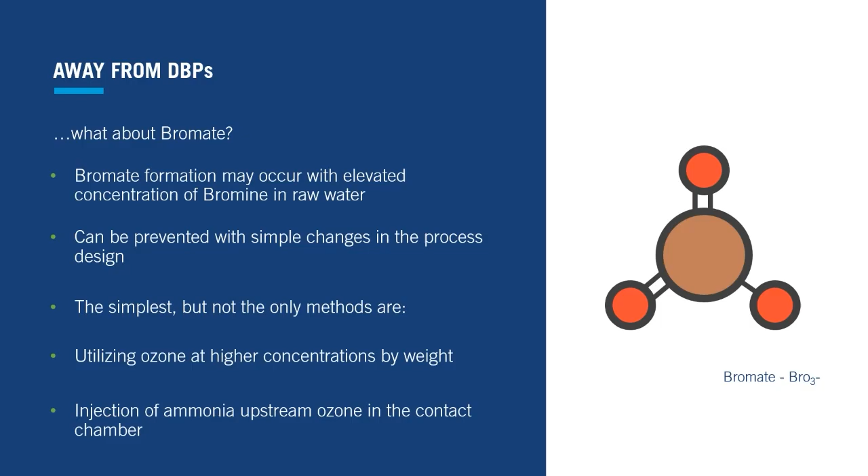At Primozone, we consider ozone a way to a sustainable future. If polluting chemicals are used to achieve removal of a target contaminant, the cure could be worse than the disease. That is not the case with ozone.

By reducing the use of chemicals, ozone can be the key to more sustainable and environmentally friendly water treatment and industrial processes. When ozone is used for disinfection, it can limit the use of chlorine to the amount needed for residual. And ozone can replace chemicals in industrial applications, like textile and pulp bleaching, or in cooling towers, like the ones of Heqi power plant in China, the installation that we're showing here.

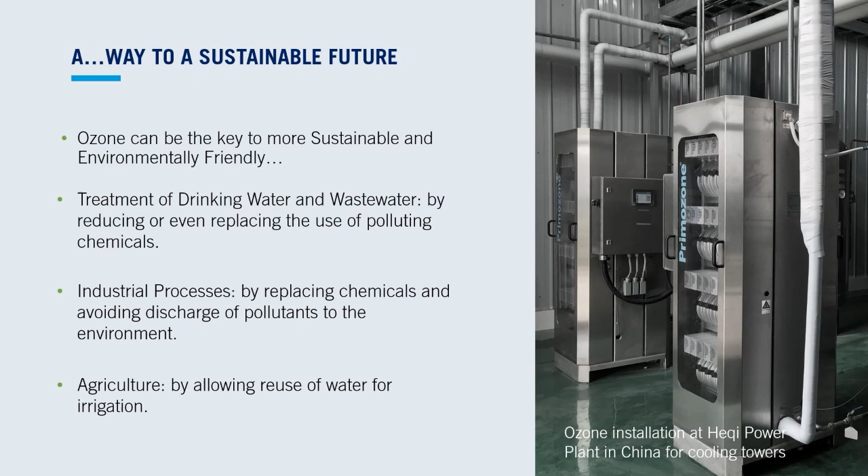Ozone helps making agriculture more sustainable, allowing reuse of water for irrigation. For example, at Metrolina greenhouses in Charlotte, North Carolina, water reuse would not be possible without ozone, used to break down a growth inhibitor that is used on certain plants but shouldn't end up on other plants.

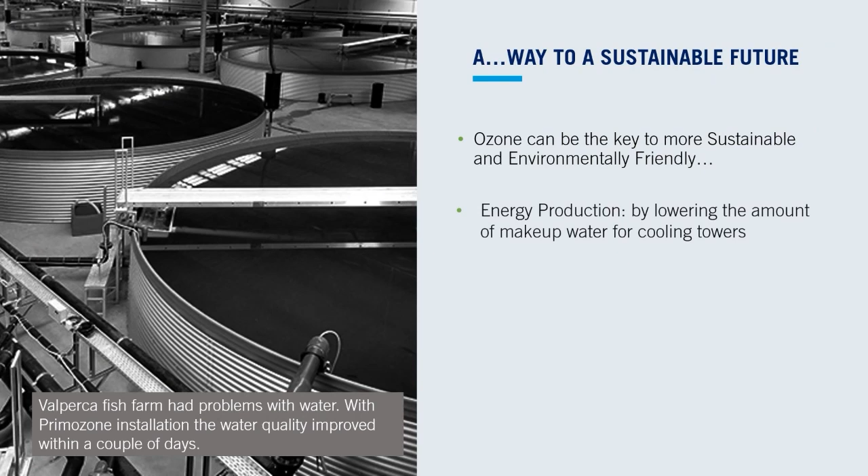Ozone makes energy production more sustainable by lowering the amount of makeup water necessary for the operation of cooling towers and by being part of cleaning processes that increase the efficiency of solar cells.

And finally, ozone makes aquaculture more sustainable by improving fish health and growth rate in recirculating aquaculture systems. Ozone supports the transition of fish farming from open waters to land, and so the conservation of our beautiful coast and surface waters. Ozone is part of sustainable fish farms like Valperca in Switzerland, shown in the picture here.

And with this, looking forward to a bright future with a cleaner world, we would like to conclude our walk through the numerous benefits of ozone.